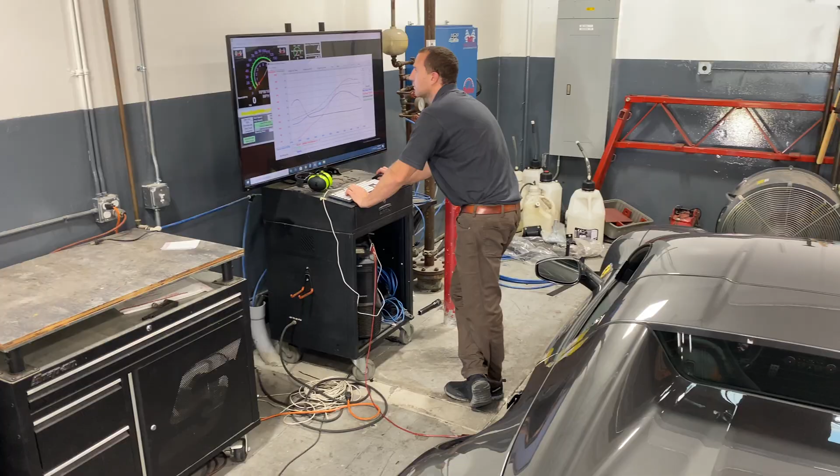Today I wanted to talk to you about our Mustang 500 SE all-wheel drive dyno, what it can do, and what people use it for. A lot of people think dynos are just for measuring power output, but it can actually be used for a lot more than that as a troubleshooting tool. I wanted to go into detail about how you could use it to find out different things about your car, what the next modification should be, if there are any problems with the current setup, and what the dyno can tell you to help address those issues.

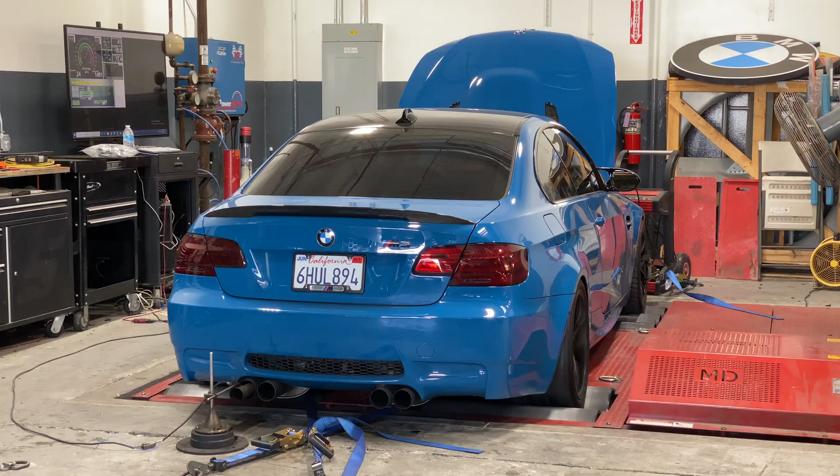The car we have on the dyno today is an S65 powered E92 M3 with a supercharger kit on it from ESS. We've been running it just to make sure it's healthy, and it's in the initial break-in stage. I have a couple of charts I wanted to run through with you to show what the dyno is capable of logging and how you can use that information to determine if your car is running well or if there are things that need to be addressed.

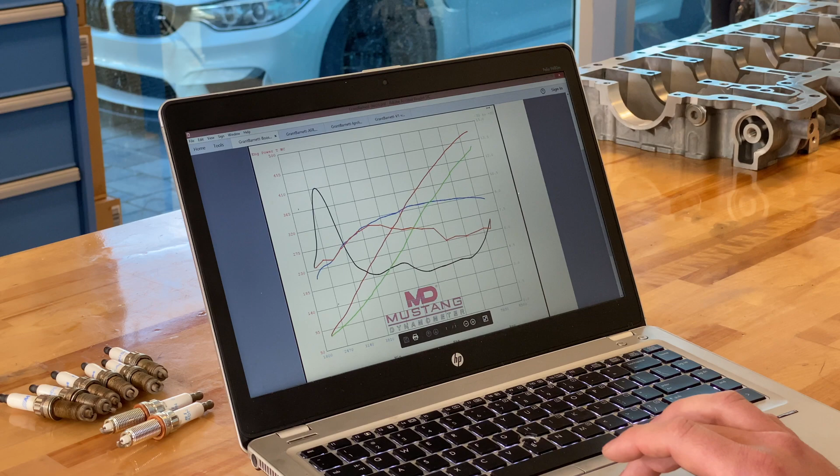This chart here is engine power versus boost pressure, in PSI. We know the supercharger at peak, about 8,600 RPM, should make 14 PSI. We're not quite running it all the way up there yet because we're still breaking it in and troubleshooting. But what you want to see is a nice straight curve of boost, not falling off or tapering. That sometimes happens when you're first troubleshooting a setup, like if you get a boost leak towards the top end. We want to see it get up to 14 PSI at peak. If you imagine this line going straight, you can see it would get up to 14 once we reach 8,600 RPM. That's one thing you can do to troubleshoot a boosted setup with the dyno.

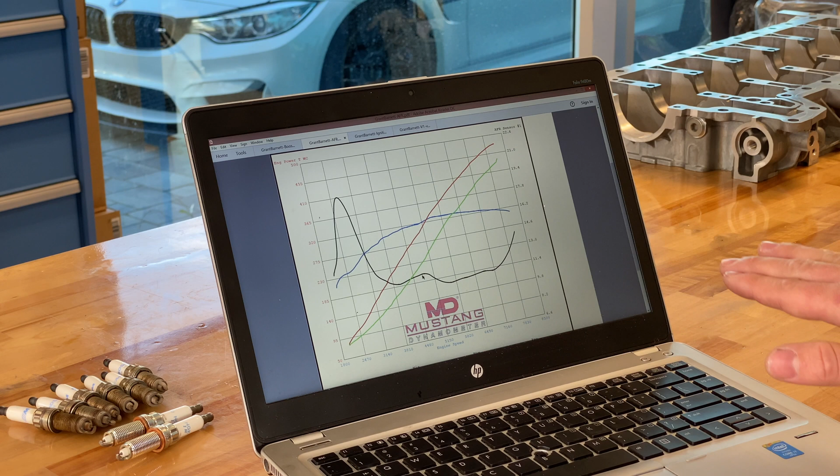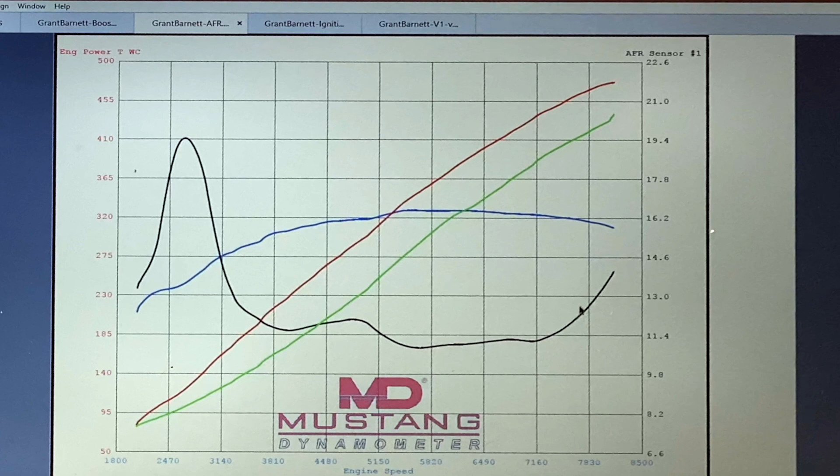This is a chart of engine power versus air-fuel ratio at the tailpipe. Because we're measuring at the tailpipe, the resolution isn't great right at the beginning. But once we see it come down here, on this supercharged car we're looking for an AFR of around 11 to 12, staying underneath 12, especially at higher boost levels. We should see it richen up gradually, closer to 12 once we get to redline. What we're seeing here is that the car is starting to become a little lean towards higher RPM, which indicates there might be some kind of fueling problem. We're going to go back and monitor fuel pressure and make sure it stays consistent all the way to redline. Different applications look for different AFR numbers - a naturally aspirated car might be looking around 13 at full throttle, while turbocharged cars might get down to 10 at full boost. It just depends on the application.

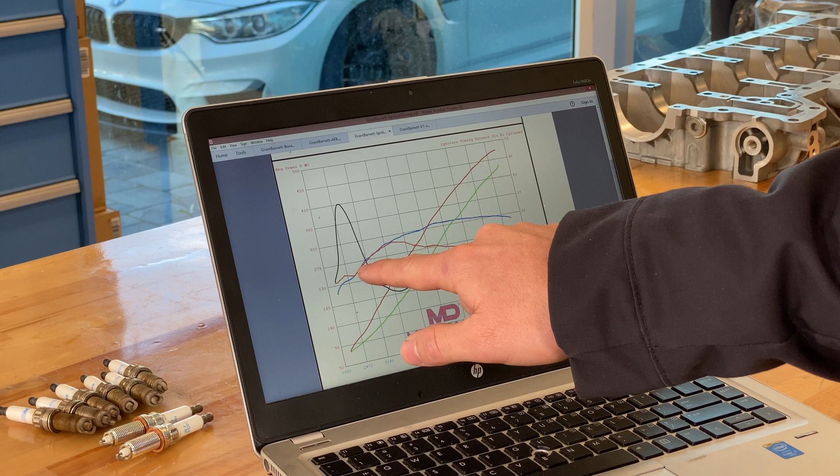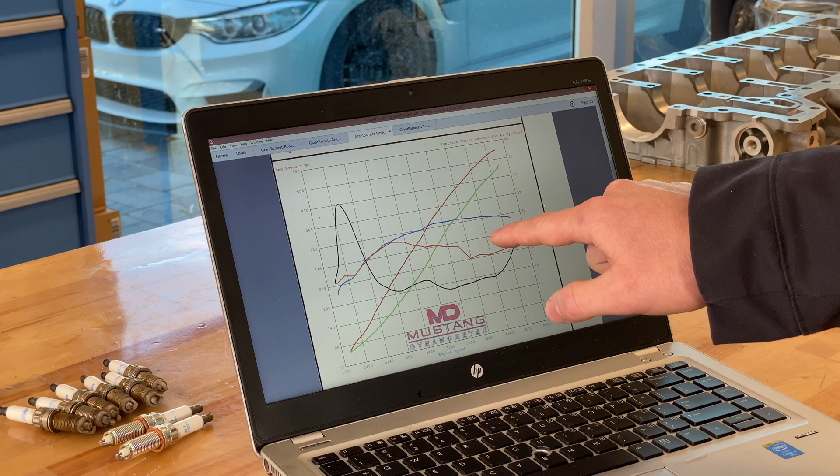This is another chart of engine power versus ignition timing. On more modern cars, our dyno can log via OBD the ignition timing on cylinder 1, which is really useful when trying to figure out if your tune is too aggressive or if you need better fuel. If the tune is too aggressive or fuel quality is too low, you'll start to see timing events where the ECU retards timing, usually seen as large spikes in this orange graph. This car is running pretty good. We have a low compression engine built for high boost, so we expected this chart to look about like this - ignition timing peaks up around the low torque area, and towards redline, as boost increases, ignition timing is climbing down. We're not seeing any large dips in the curve, so we know the ECU isn't pulling ignition timing on this engine, which is what we want to see - a healthy chart.

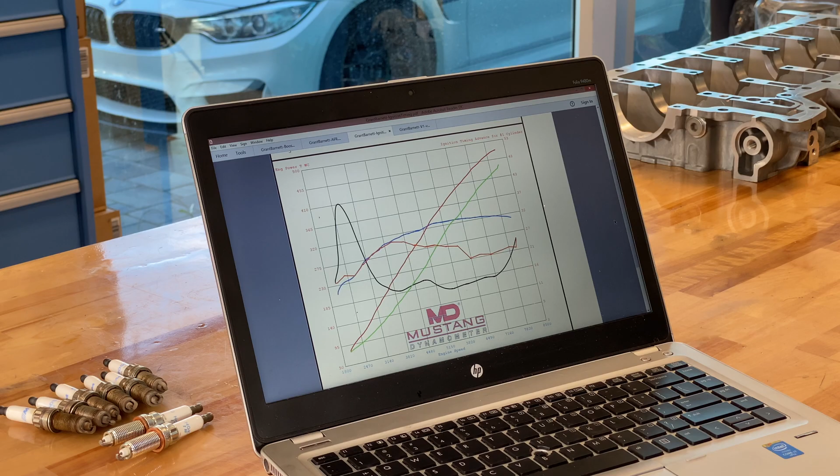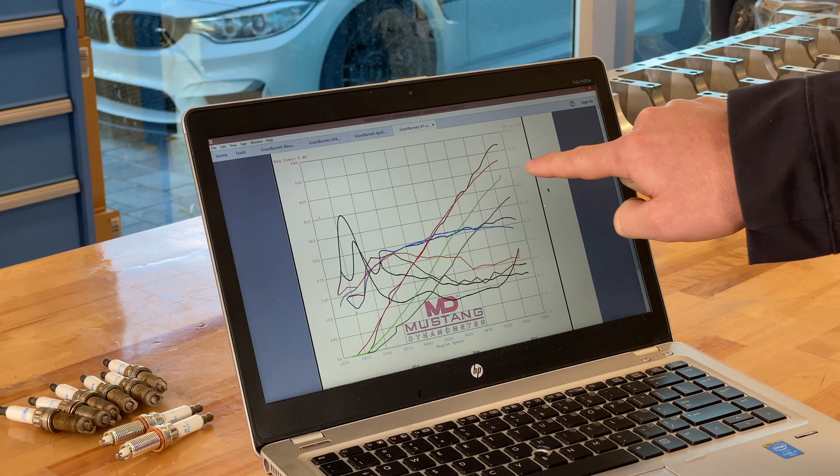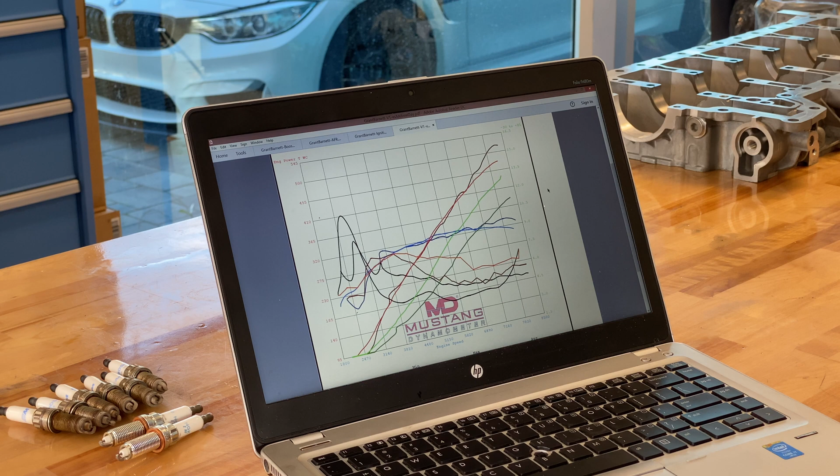This chart looks a little complicated, but it's just something we did to show the types of data we can overlay - two different cars, another supercharger setup with less boost. We're trying to show the differences in boost pressure and power. What alarmed me is that we have a lot more boost in this particular car, same engine, same setup, but the power isn't really that much better - it's about the same. So we're going to go back and figure out why we're not making as much power as expected. We've got a lot of data on this dyno from different cars with similar setups to probably what you have. Once we run your car, we like to find another chart for a similar car and compare to see if you're making about the right amount of power, if the ignition timing is similar to another car with a similar setup, that kind of thing.

So there are a lot of reasons to come and have your car dynoed. There's a lot of data we can collect, and we have a knowledgeable team here that can analyze that data for you and give you a lot of information about the health of your car and what you might need to do for your future modifications to get the most out of your vehicle.